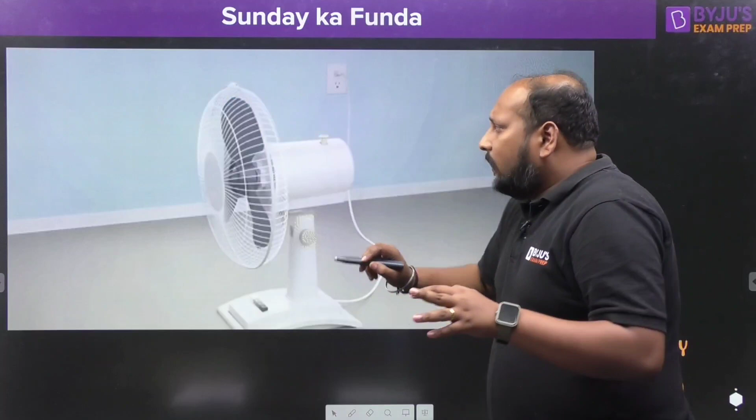Because many students don't have that concept. It is rotating about this axis, but how it is having an oscillatory motion, that is important. How is it converting one motion into the secondary, an oscillatory motion? That means the complete rotation motion is converted into a rocker or an oscillatory motion. For that, let us first of all understand the concept of 4 bar mechanism.

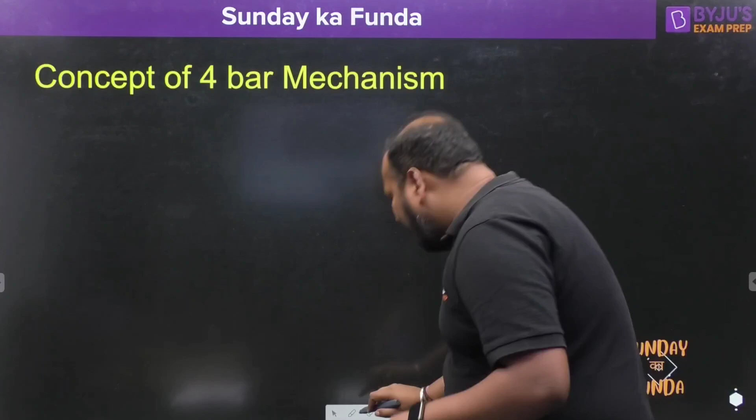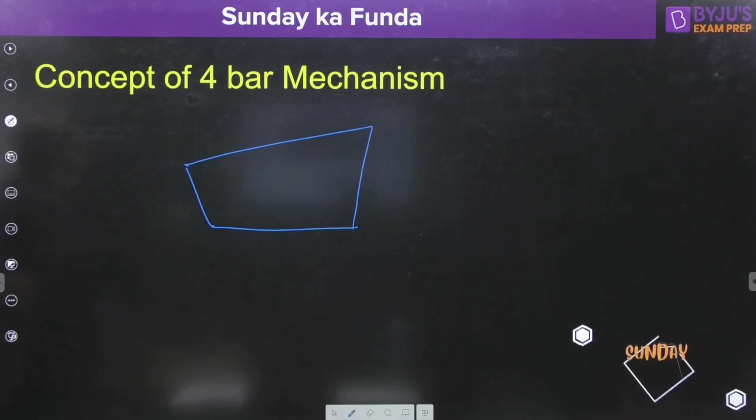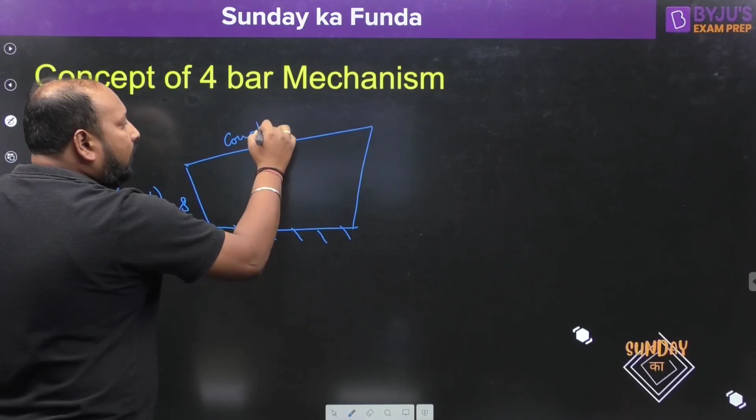It's quite easy. You have 4 bars connected by 4 turning pairs. Let us suppose I'm fixing this link. This is the shortest link, which we always call the crank. This is the coupler link, and this is the output, or we can call it the follower link. So basically here we are applying the concept of Grashof's law.

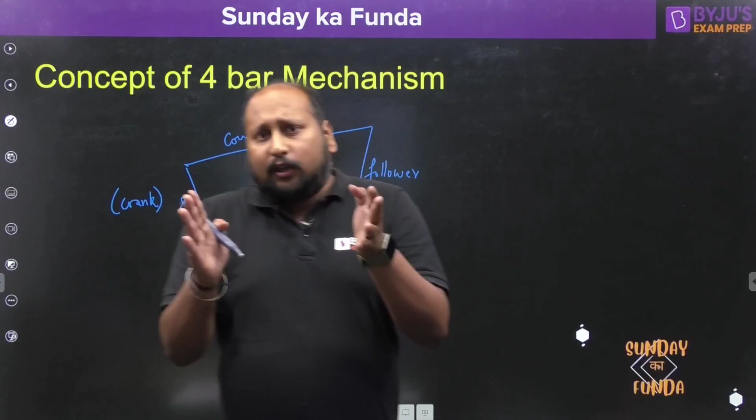What is Grashof's law? If the summation of the lengths of the shortest and longest links is less than or equal to the summation of the other 2 links, then if you fix the shortest link, you get the double crank mechanism. That means both input and output will have rotational, or crank, motion.

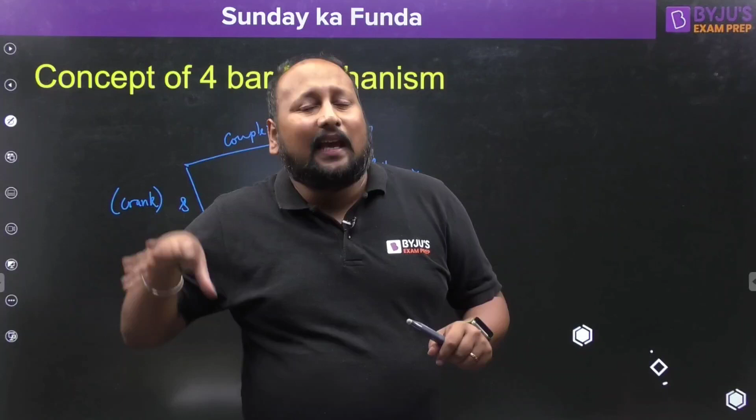If you fix the link adjacent to the shortest link, you will get a crank rocker mechanism, and if you place the shortest link at the coupler position, you will get the double rocker mechanism. We have seen this in Grashof's law, but how this concept is being implemented in the oscillating fan, let us hear in this video.

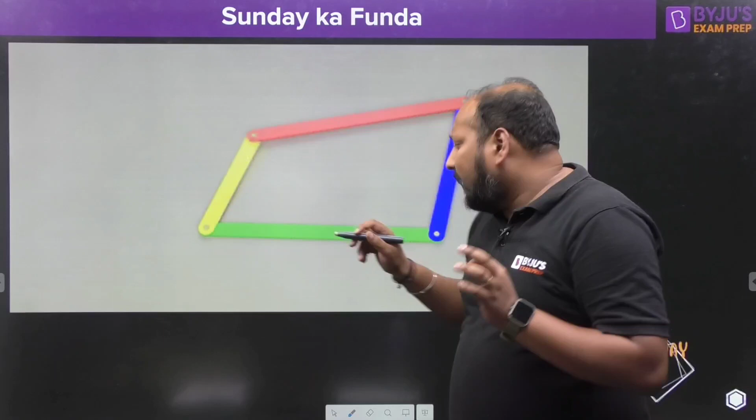Right now, we know what a 4 bar mechanism is. We definitely have a fixed link. We have a crank, or shortest link, and every single link is connected by a turning pair. This is a turning pair. If you zoom in, you can see very clearly that 2 joints have a turning pair. So now let us try to visualize what is happening in this particular linkage.

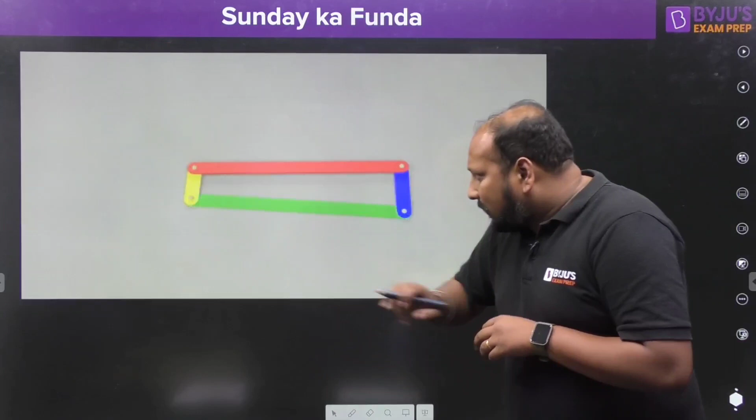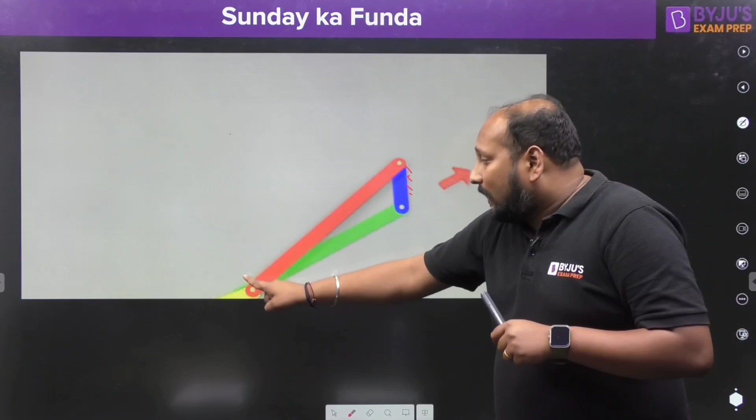Okay, now if you try to visualize what is happening, we are fixing this link, and in this complete motion, the shortest link, this yellow one, is kept at the coupler position. That means the shortest link is making a complete 360 degree rotation. If you try to visualize, it is a complete 360 and we are getting an oscillatory motion.

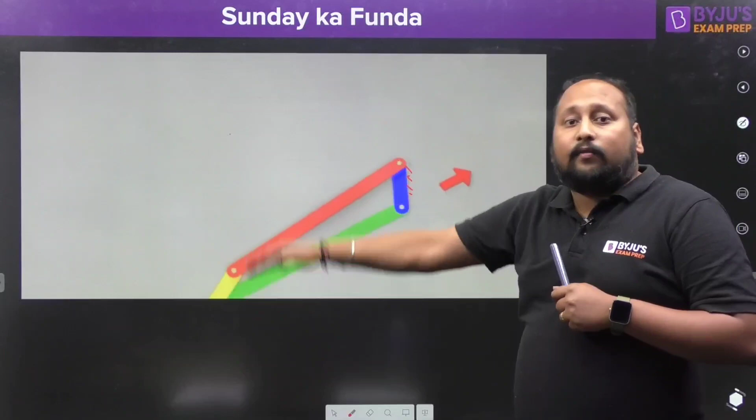So definitely this kind of arrangement we can use in our oscillating fan, right? So let us try to see how this is being used in this case. Now if you try to visualize, this is the motor of the fan. Okay, so this link is the shortest link. This is the fixed link.

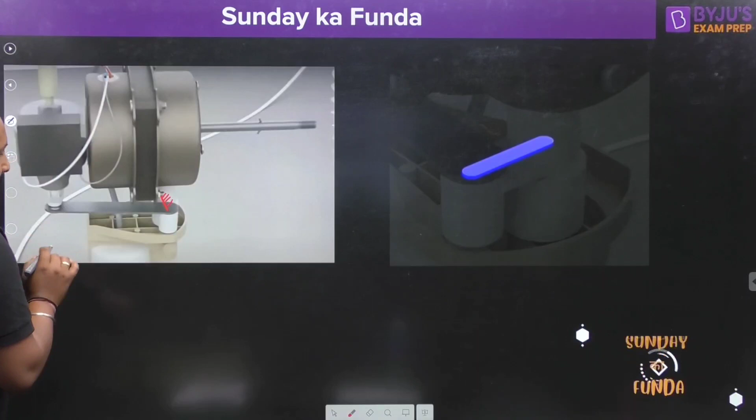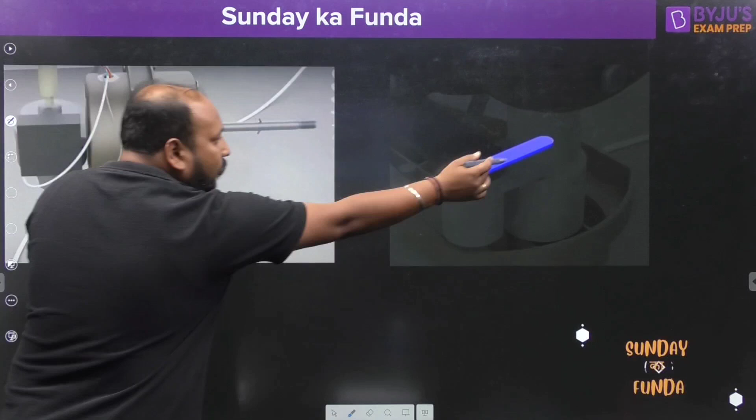And if I talk about the next one, this one is the next link, which has the red color. This one is the blue color, the fixed link, which is being shown over here. So this is the red one which you are seeing over here. After this, if you try to visualize, this complete motor will be the link.

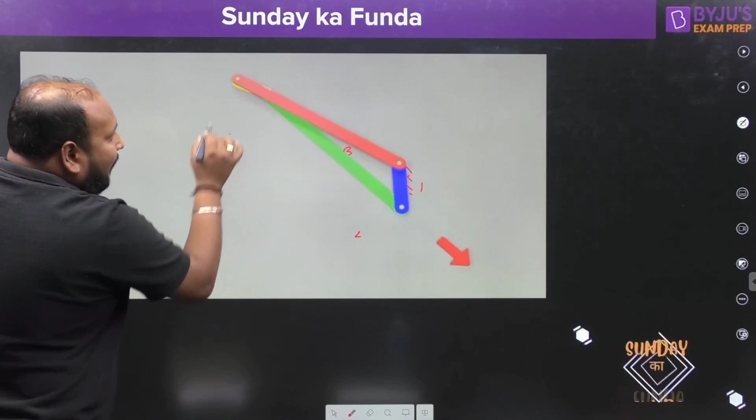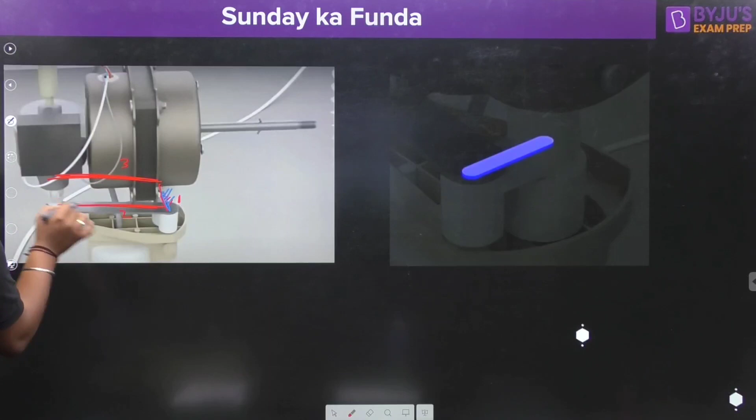This is link number 1, this is link number 2, this is link number 3. The motor is the complete link number 3, because if you try to write the same number over here, this is link number 1, the green one is link number 2, this is link number 3, and the shortest link is link number 4. So if I use the same nomenclature over here, link number 1, link number 2, the complete motor is link number 3, and the connection between the motor and this link is link number 4. So we are basically arranging this 4-bar mechanism in our oscillating fan.

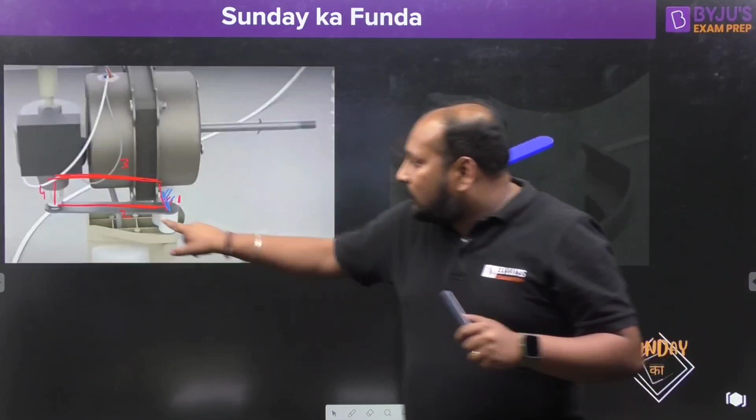If you try to quickly visualize, this is link number 1. Link number 2, this green one, is link number 2. If you're able to visualize this clearly. If I talk about link number 3, the red one, the complete motor is link number 3, because we want this complete system to have an oscillating motion. And the connection between these two, the motor and this linkage, is your link number 4.

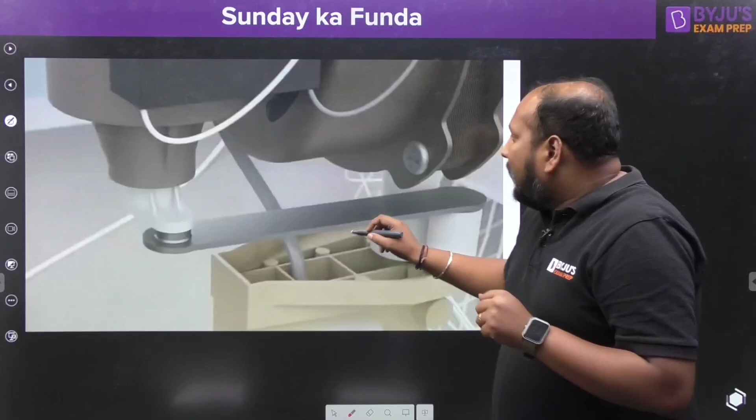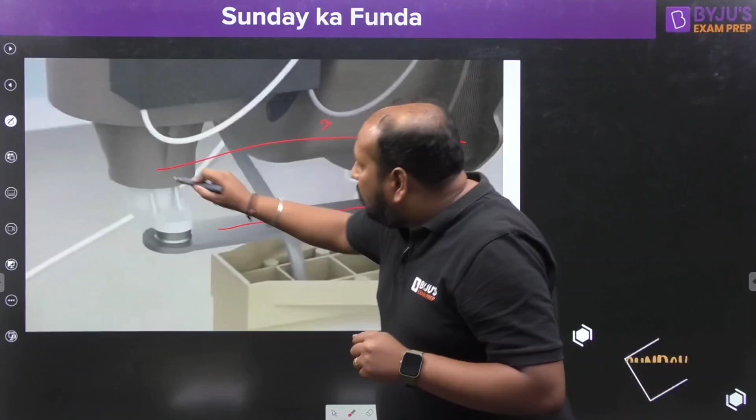So we have seen how these 4 different links are connected with each other. If you zoom in, we have this as the fixed link, link number 1, link number 2, this complete fan is link number 3, and this connection is link number 4. So now, if I am able to provide a crank motion to this link, the complete system will be oscillating.

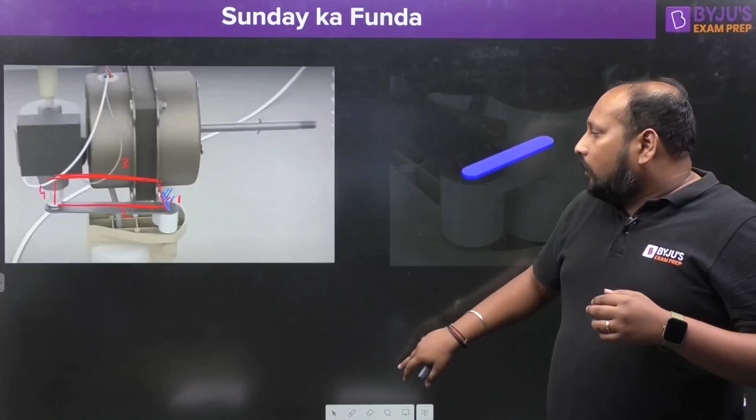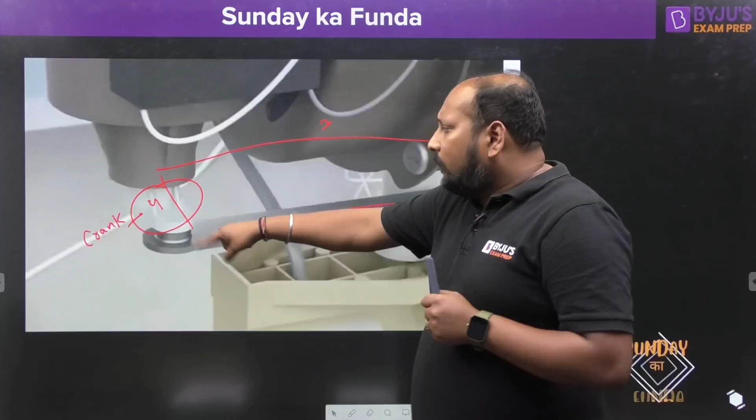Is this clear? If I provide a crank motion to this yellow one, link number 4, the complete system will be oscillating like this, and this is basically used in our oscillating fan. But the problem over here is, how can we give the continuous rotation motion to this link? Link number 4 has to rotate like this, but the fan rotor rotation is in a different plane. How can we convert this and shift that motion to this particular link?

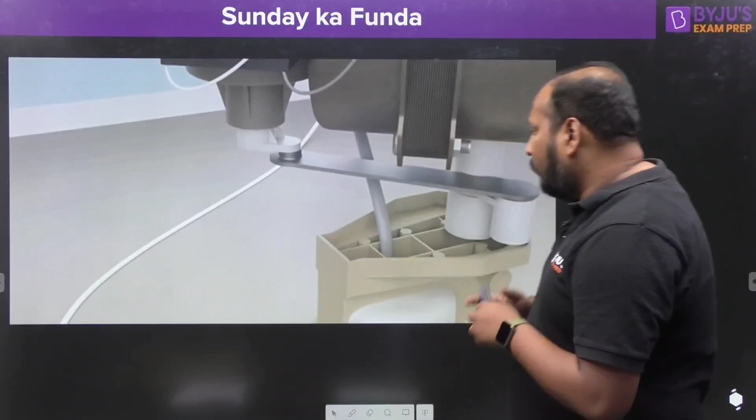For that, we are using the concept of a gearbox. If you try to visualize, the complete gearbox system will be present inside this. If you see, this is a worm gear. This worm gear is connected with the rotor of the fan, so it will be converting its motion in a perpendicular direction.

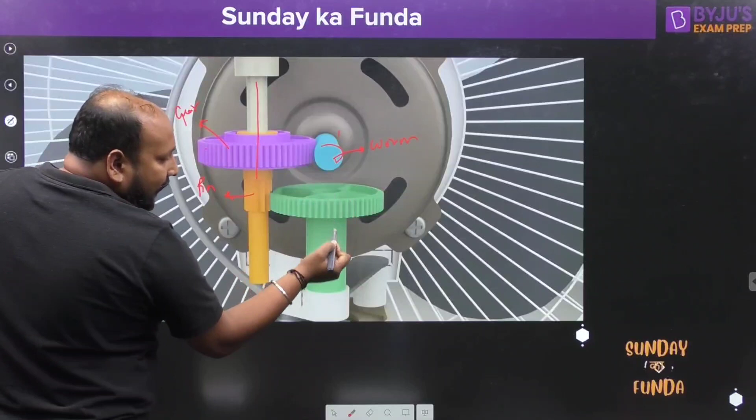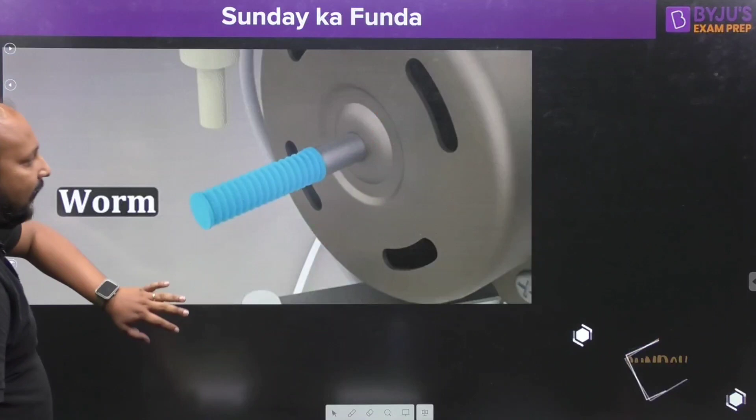It is connected with the gear, and in between there will be one pin, or we can say pinion, and this pin will be connected with this gear, and this gear is connected with link number 4, and that is the way of providing that continuous rotational motion. If you see the animation, that will be very clear. This is the worm gear connected with the axis of the fan. Once this is connected, it is transmitting its motion to the gear.

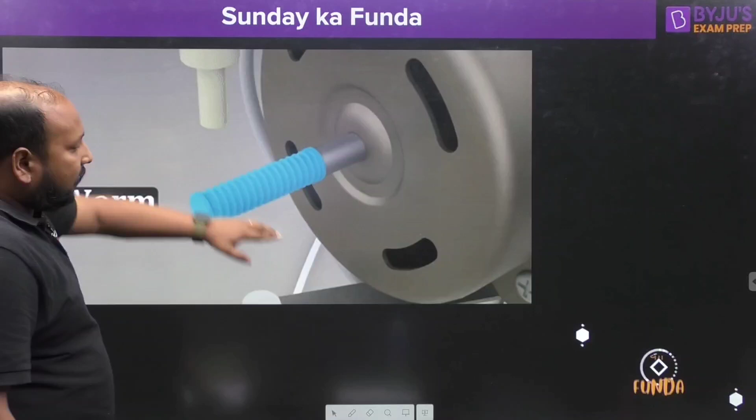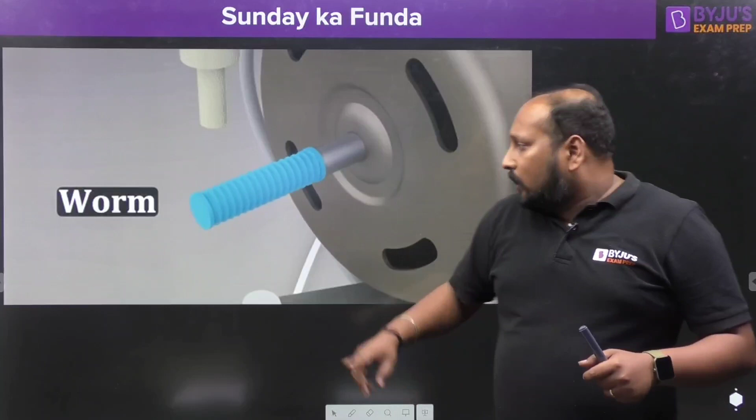Okay, this is your worm, and this is connected with the worm gear, and there are two main advantages. The first advantage I'll be telling you right now: it is able to transmit the motion in a perpendicular direction. The rotational axis was this one. Now the rotation has been changed perpendicularly, and we wanted that perpendicular shifting of motion, right? So that is the first advantage of this worm and worm gear. The second advantage we'll be seeing at later stages.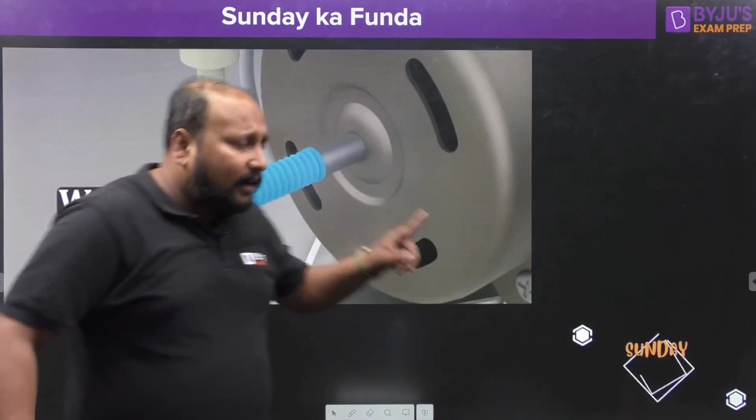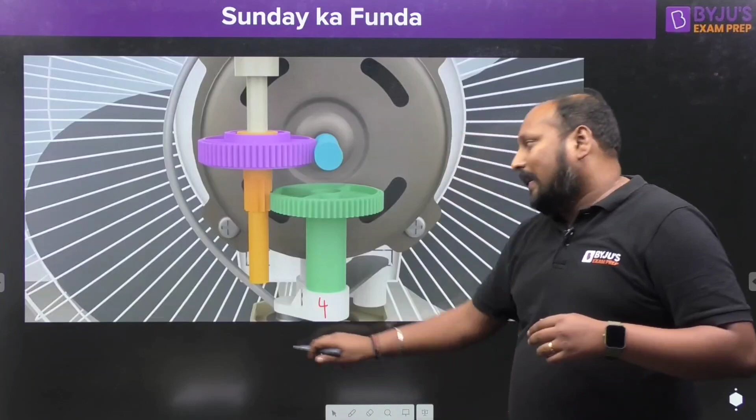So we have converted the motion in a perpendicular direction on a worm gear. Now this worm gear is connected with the help of a pin. This pin will be transmitting the motion to this green gear, and this green gear is connected with link number 4, the shortest link, and this way the fan will be oscillating very easily. But the problem is, sometimes the fan is oscillating and sometimes the fan is not oscillating. So definitely we have to use a special mechanism. We are using the concept of ball bearing.

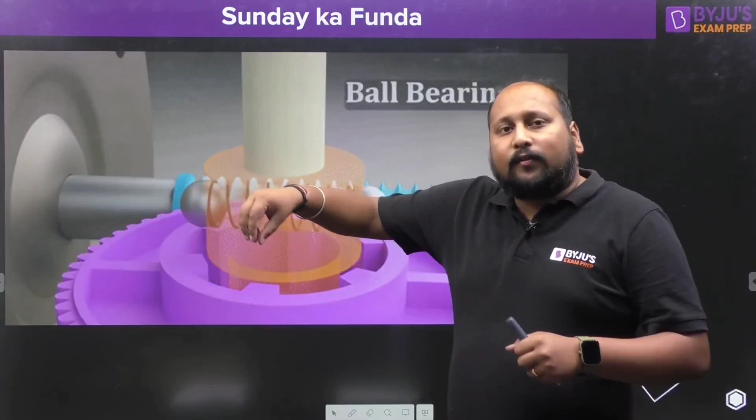If you have seen in the previous video also, there is a knob. When we lift that knob, the complete system is stationary. The fan orientation will be in the same direction. When we push that pin, the complete system is oscillating. So the same thing is over here. When this is lifted up, there is no engagement. No circular motion will be transmitted.

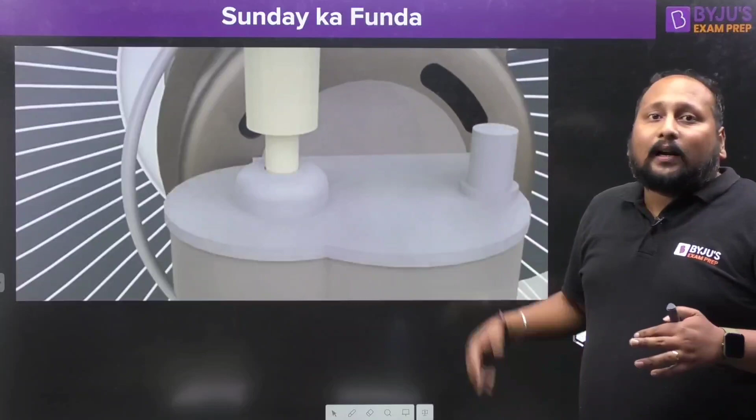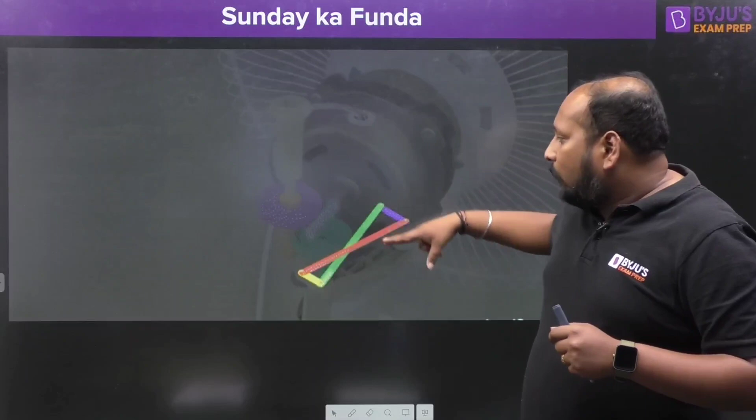But as soon as we are pushing this downward, the engagement will be happening, and we will be able to transmit the motion very easily. If you see over here, when we are pushing this downward, this yellow one is being engaged with that gear, and we are able to transmit the motion in an oscillatory way. There's a ball bearing inside this and it is being rotated.

That means when you push the pin downward, this ball bearing has a spring, right? So when it goes inside this, it will be interlocked over here and will be able to transmit this motion. Once the motion is transmitted to this gear, it will transmit the motion to the green one, and the green one to link number 4. So this way we are using the concept of a 4-bar mechanism in order to have that beautiful oscillating fan mechanism.

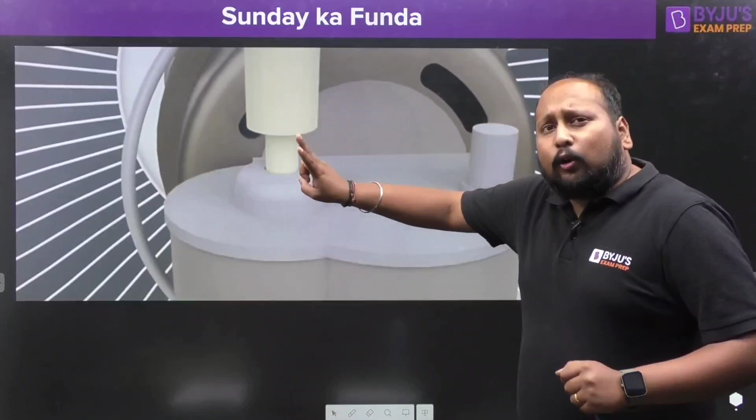I told you I'll be telling you the second important aspect of worm and worm gear. Why are we using this worm and worm gear? The first one is to transmit the motion in a perpendicular direction. The second one is, suppose you are not using a worm and worm wheel; the rotor of the fan is rotating with very high RPM, and if I'm giving that same oscillatory motion, failure is going to happen. This will have a very high oscillation and the complete system will undergo failure.

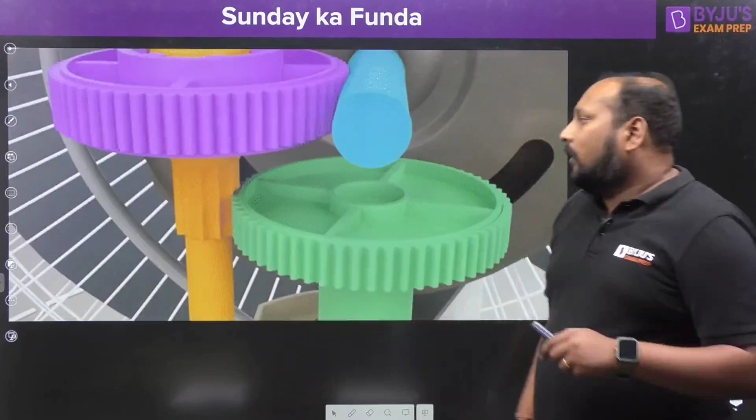That is the reason, because worm and worm wheel has a very good property: a huge speed reduction ratio. Worm and worm wheel gears are classified as having a high speed reduction ratio or velocity ratio, a speed reduction gear, right? So the two very important advantages of worm and worm wheel are to transmit the motion in a perpendicular direction and to reduce the RPM, because if you use the same RPM, failure is going to happen. So this is all about the concept of the worm and worm wheel, and the oscillating fan we have understood in a very detailed manner.